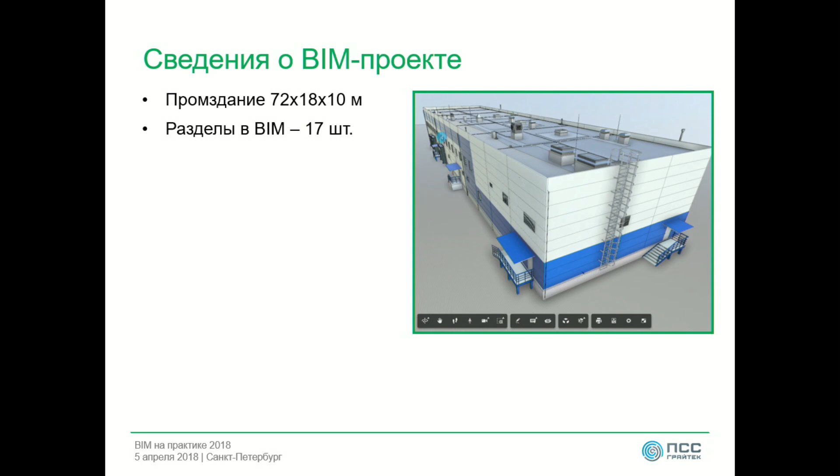Quick info about this BIM project. This is an industrial facility, 72 by 18 by 10 meters. It's a rather small facility, but it's very fitting for our purposes.

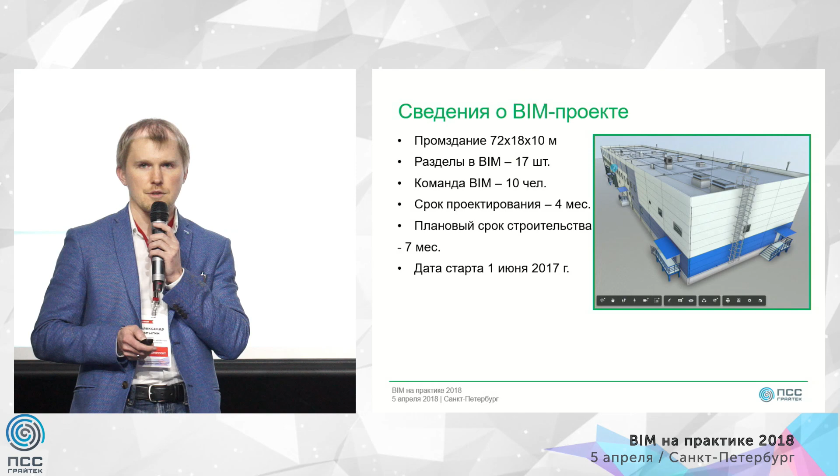17 parts in BIM project, 10 people. Construction plan schedule was 7 months, and design began on June 1st, 2017. LOD 400.

Our main goal of using BIM technologies was to present to the clients the capabilities, the potential of this technology, and to demonstrate our strengths and our capabilities in working with BIM 360.

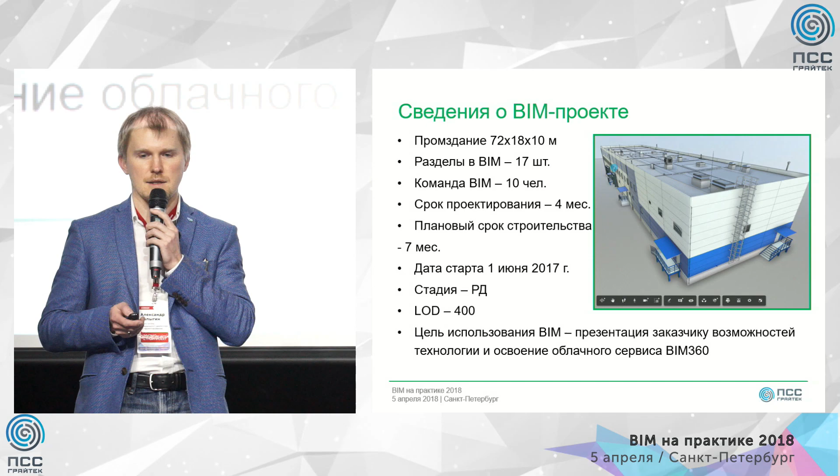We decided to use this cloud service, BIM 360, in our next project, because we worked with a remote design team, and we thought that it would fit perfectly considering our needs.

Apart from cloud solutions, there were also local solutions: BIM 360, Glue, Field, Recap Pro, Recap 360 to analyze laser scanning, Revit, AutoCAD and Navisworks.

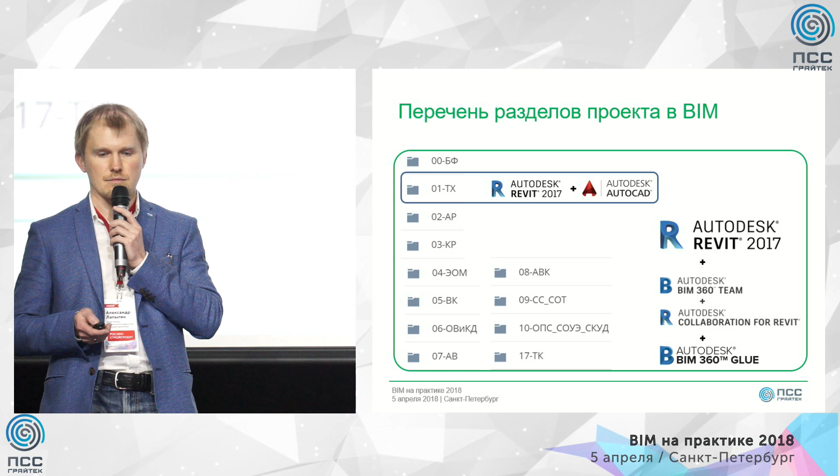This is how it breaks down, category by category, but I think it's more or less clear and self-evident. Everything is according to a GOST state standard.

The BIM uses list shows that we've used BIM mainly for design and for on-site supervision.

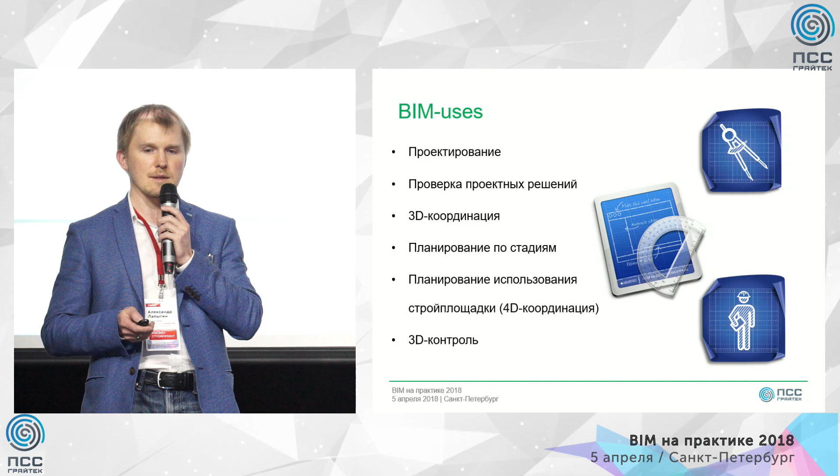Goals. Any design team has one main goal: to improve the quality of the final result.

So all the modern technologies and modern tools that provide this functionality all have this ultimate goal in mind, and we shouldn't forget about it. Everything else is secondary.

What we also needed was to have access to all files in one place with internet access, to use external links while working with models, so that the chief engineer could always have access to these models, and version history.

To maintain the version history of the files and of the models was also important, so that if anything goes wrong, we could go back a step.

And also make functionality to leave comments and remarks, and to evaluate the quality, the results of work. That's also very important, and something that is overlooked very often.

So 10 people, like I said, there are 10 people here: electric engineer, utilities, water engineer, automation, architect, designer, BIM manager, and chief engineer. So several things that we did when we prepared for this project.

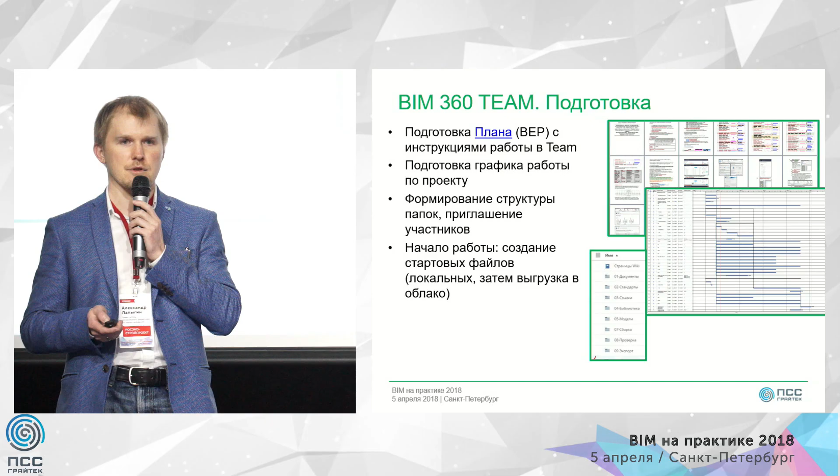Folder structure, invitation of all participants, then start of work. You cannot just copy a local model file to the cloud.

First you need to make a file in the cloud to be able to work with cloud-based files later on, and external links. So we had to make these start files first.

Our consultant, PSS Graitec, whom we worked with during this project and whom we consulted with extensively throughout the project, helped us with cloud services in particular.

This enabled us to check for conflicts and collisions, and to prevent these conflicts from appearing during the design stage.

Just a recent case, 1 week ago, happened in our company. Designers who didn't have any Revit experience, who have to work in Revit now, but who only work in their own section, do not have this habit of uploading the next sections.

So recently we had a model with very big conflicts between different utility networks, which they could have easily avoided had they uploaded the next sections to the left and right from their section. So that's something to pay attention to.

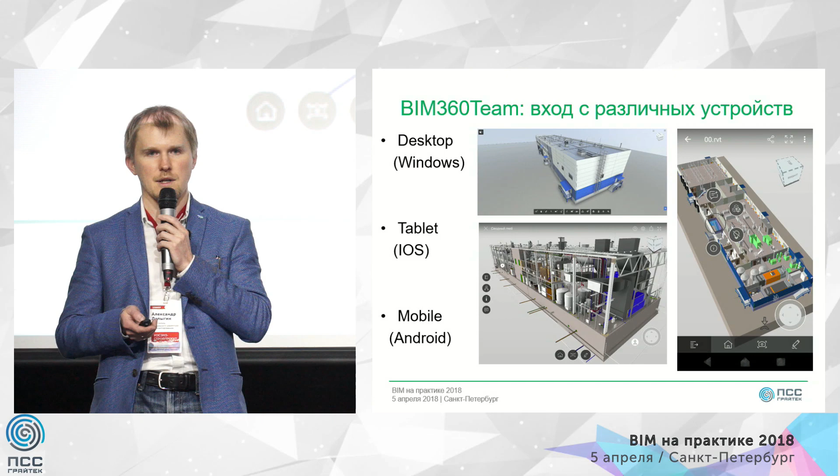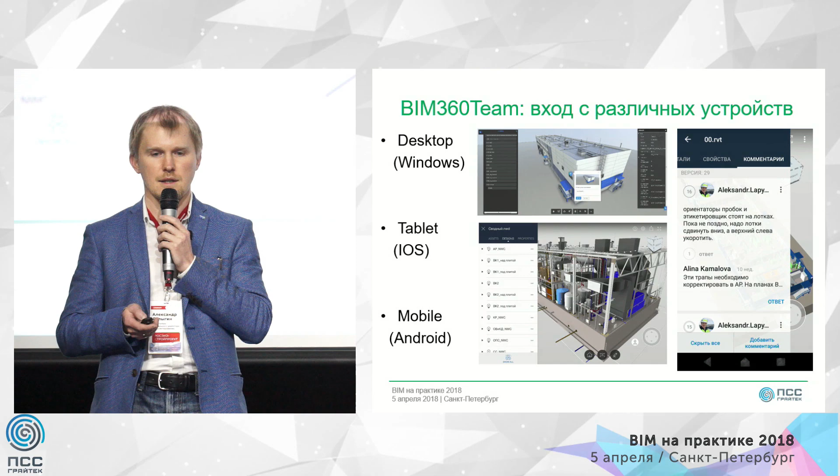So Windows, PC, iOS, iPad, and Android mobile phone. I can tell you, as chief engineer on this project, that it's very convenient, and sometimes the mobile app is even faster than the desktop version. It's very handy that you can access the model all the time, leave comments, and see how works are progressing.

Data uploading is also very easy. You can just drag and drop the files into the cloud, and you can also store any other file formats, not just models - AutoCAD files, PDF files, Word files, whatever.

From Revit, you can work directly from the cloud. You need to create one file-based or cloud-based model, and then it doesn't really make any difference whether you work from the cloud or locally. So sometimes designers just do not know where the file is - on their computers or in the cloud.

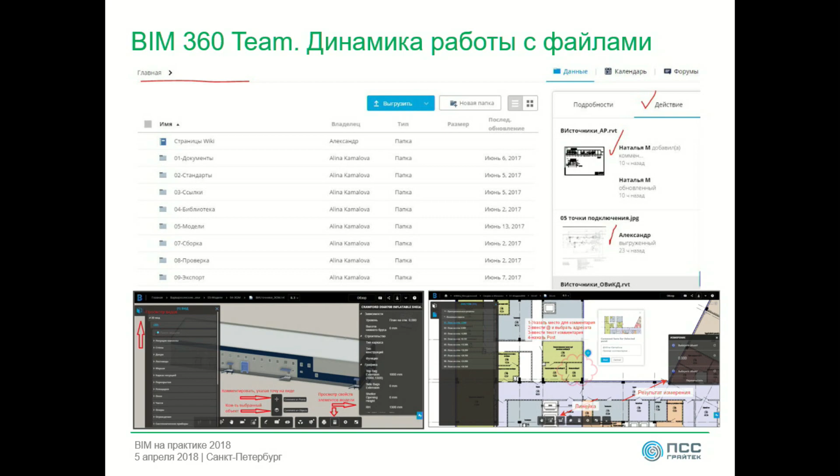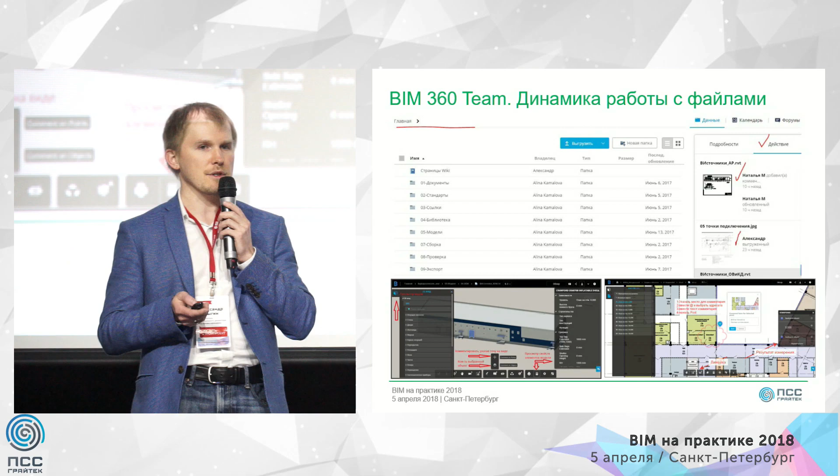So if you want to see what has changed today in the project, you go to this Actions tab and see what was changed, when it was changed, and whether there are any comments if designers left any. So this is how it looks like.

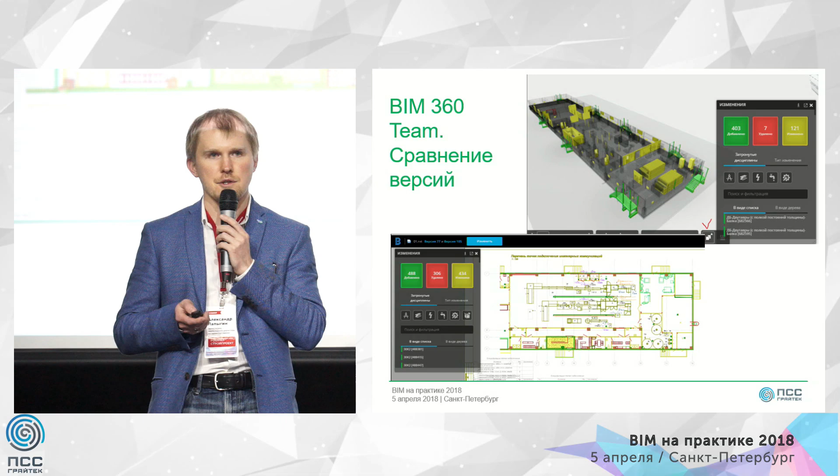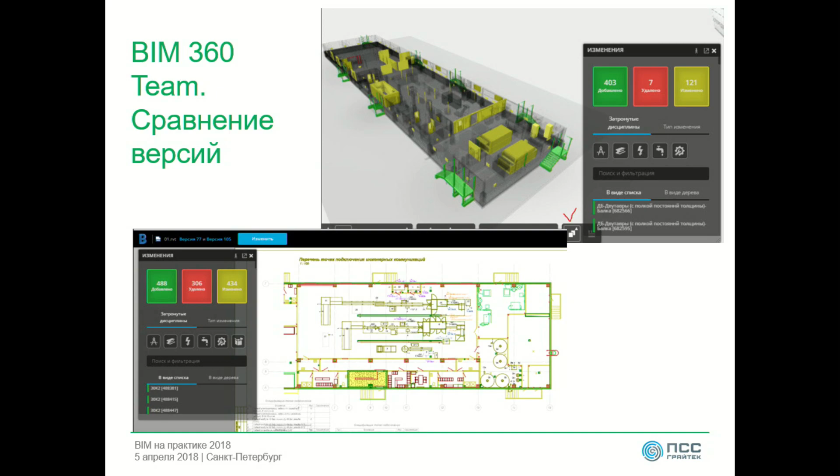Another important functionality is, if there were some changes in the files but no comments, you can compare two file versions directly in 360 Team. Here we're comparing different versions of a model, and we can see there were several dozens of new models, and you can see the difference - 488 elements were added, 306 elements were deleted, and 434 elements were changed. This may be very important both for clients and for the chief engineer and subcontractors.

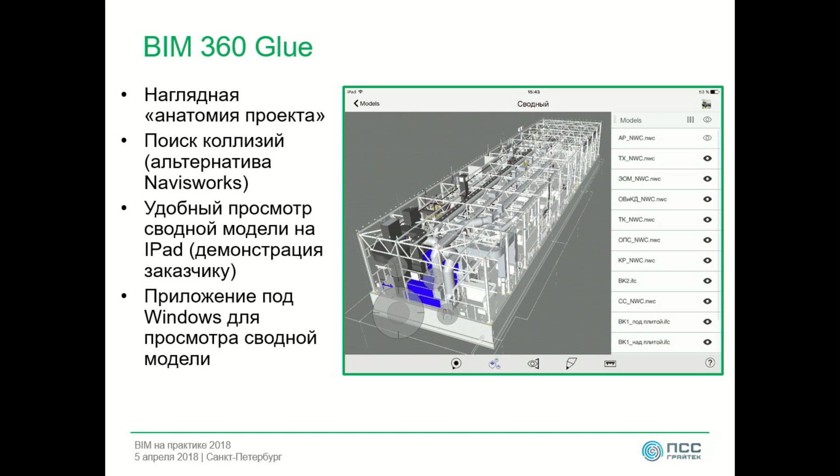Another app from the BIM 360 family is Glue. Previous speakers have already mentioned Glue before. We are using Glue as a presentation tool, because if you install it on iPad - by the way, I do not know why there's only an iPad version, I think the developers only had iPads and didn't have Android phones - but it's a good thing they have it on iPad, because you can always open the general model and show it to the client or potential client, to your partners, and it's very handy.

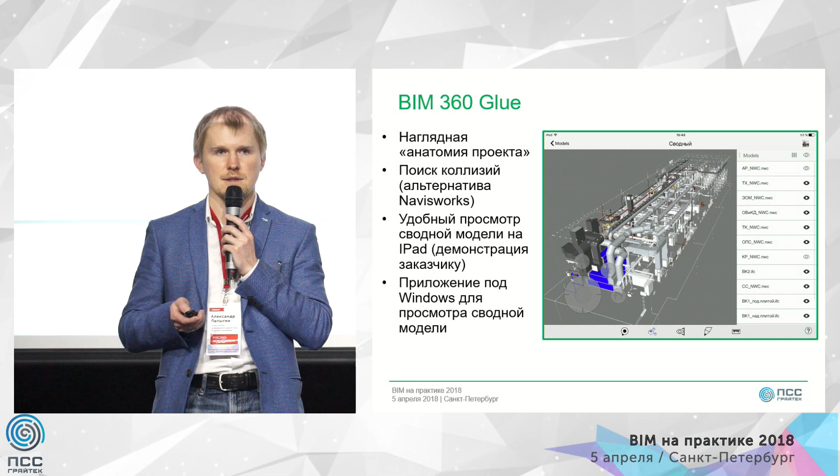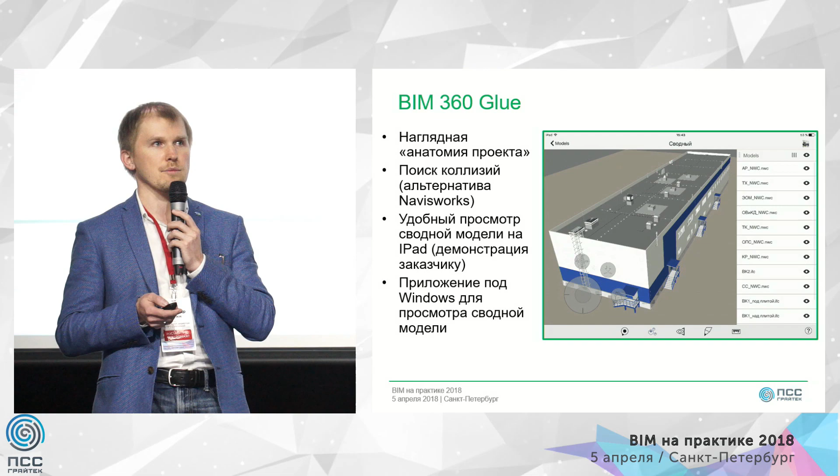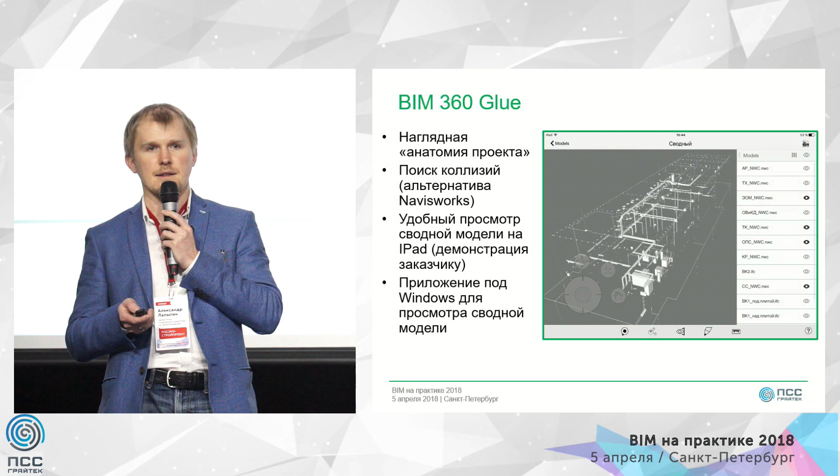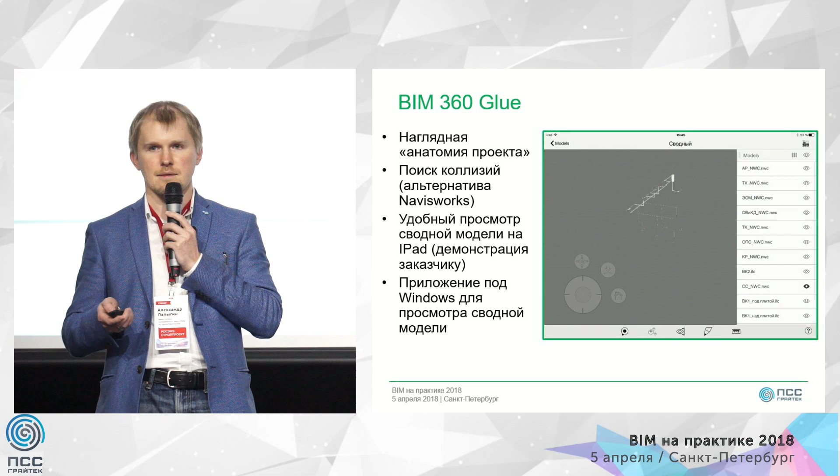Well, iPad became a working tool for me since I started using BIM 360 Glue, so I'm always carrying it with me to any meetings, so that I would be able to show quickly what we are doing. Today there were several presentations showing very impressive videos and pictures, screenshots from utility networks, MEP systems, but everything was done in Navisworks or in Revit, and you cannot carry that presentation always in your pocket. So this ability to just take out your iPad and show the client the model is a very good opportunity.

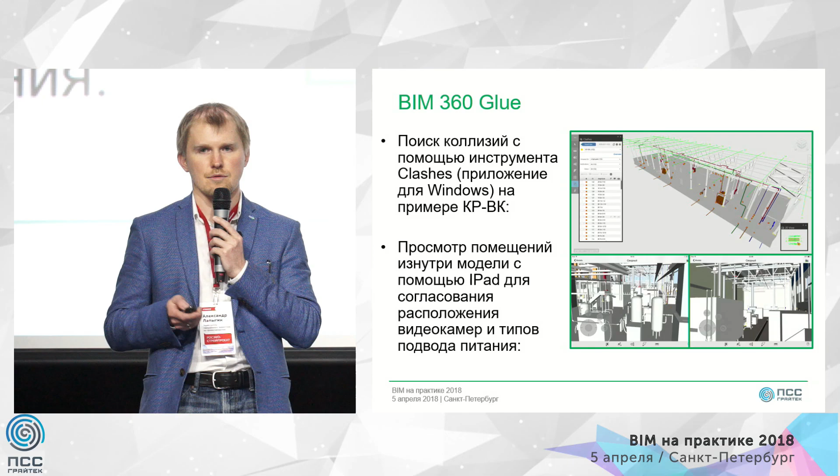Also, we used Glue for collision checking, and we also used Navisworks for it, but in the future we are planning to use Glue more. This is how it looks like when a collision is found.

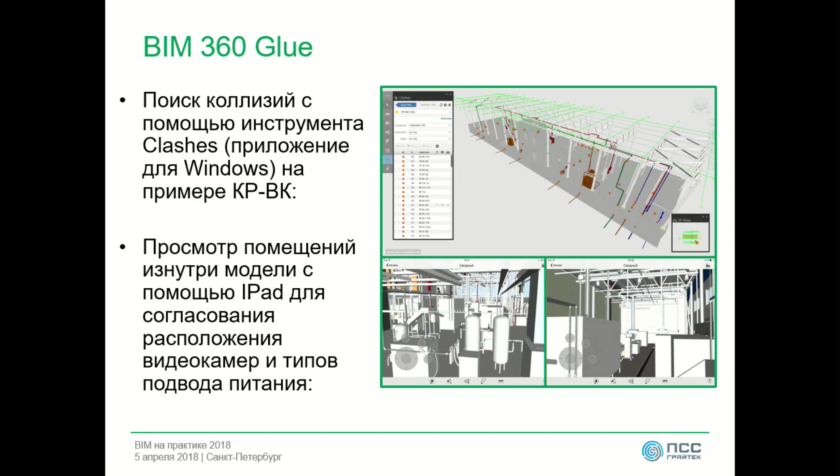The advantage of Glue is that it's cloud-based, so you can open everything in the cloud, and all designers have access to change something on the go. And again, Glue gives you the opportunity to see the inside of a model, and this gave us two opportunities: to coordinate the location for CCTV cameras with the client, so you can see, if you put a camera here, what will be the viewing angle, what will it see - it's very handy. And another advantage is electric grids.

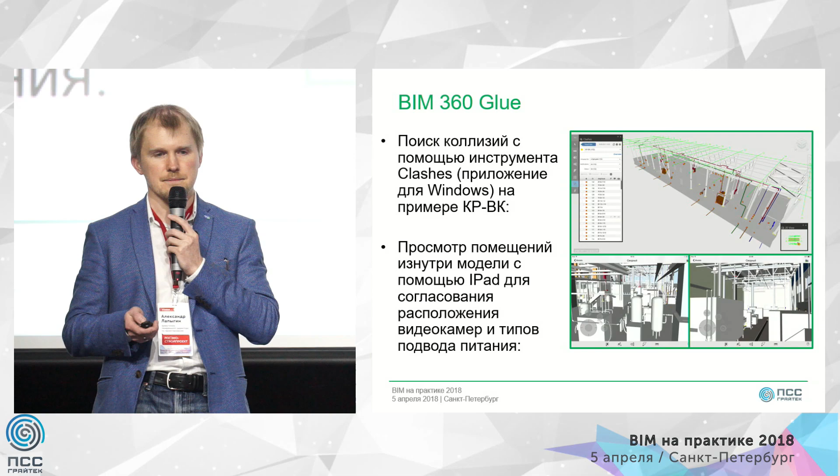Where do we get the cables, electric cables? From the top and from the bottom. And it turns out that from the top you have to use cable trays more, but it gives you more flexibility. So we decided, together with the client, eventually to use the from-the-top approach for electric cables.

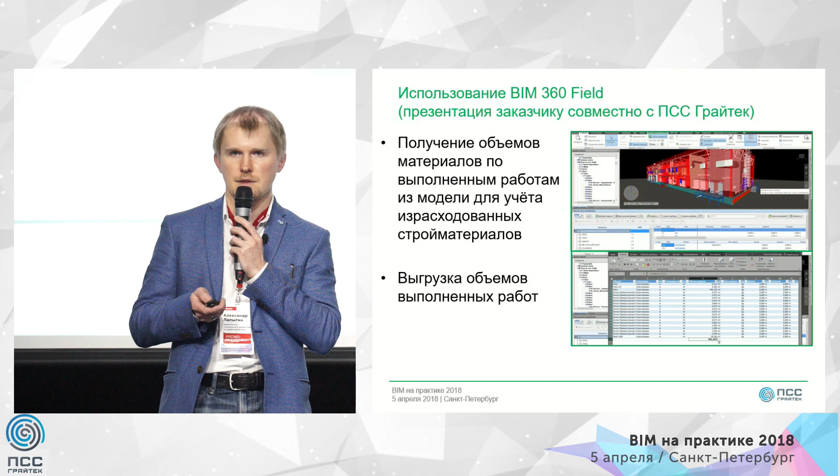Together with PSS Graitec, and with previous speaker Alexey Vlasevsky, we did some testing of BIM 360 Field. We created a presentation for the client, and you see on the slide approximately how it looked like. We showed it to the clients, showed the capabilities.

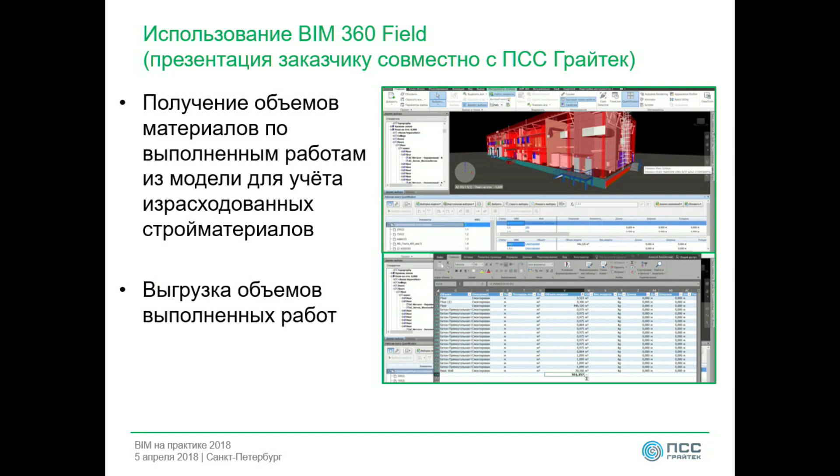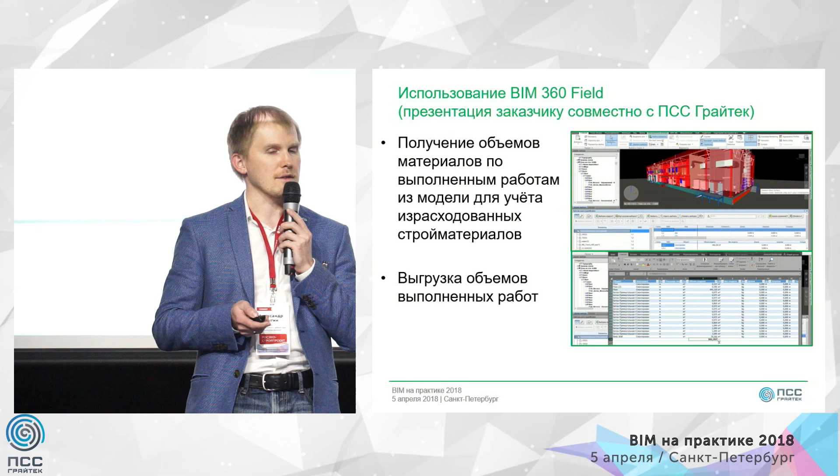In this case, it didn't bring us any further. It didn't come to fruition, because the client should also have their own in-house expert who can do the BIM control, or a hired professional. But the budget wasn't big enough, so the presentation remained just a presentation. But the client now knows they have this opportunity, and maybe in the future they will use it. Besides, there's going to be another Field version coming out soon with additional functionalities, so it's quite exciting.

Although clients still had this nasty habit of sending letters requesting the updated version of the drawing, so they still are not completely trusting the cloud. Please send us the latest version of this drawing.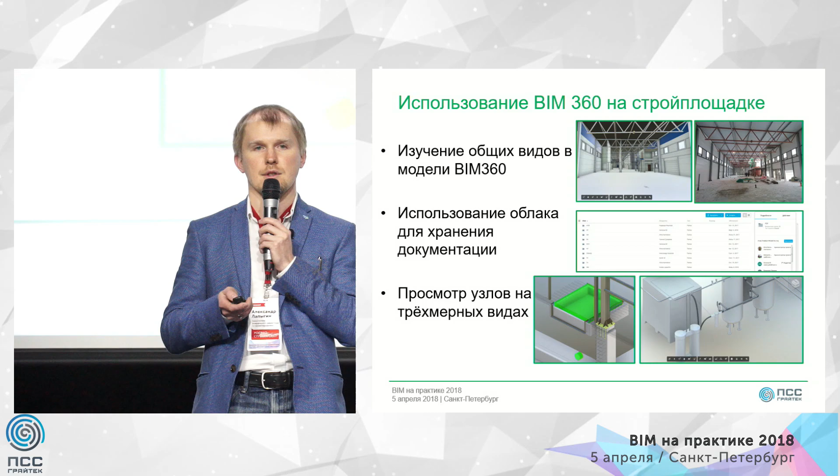And 3D view of different joints. Again, using Android apps or iPhone apps, you can download a model from the cloud and see the details of some small things, like in this area, for instance, where you have a 3D compressor model, and it's very detailed.

Laser scanning is another thing that we did. After the installation of all steel structures, we did the laser scanning. You can see the results. This is not a picture, this is just a point cloud.

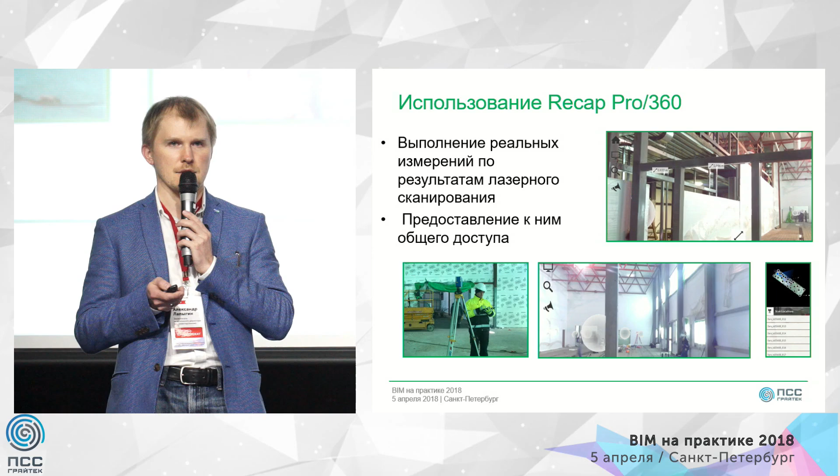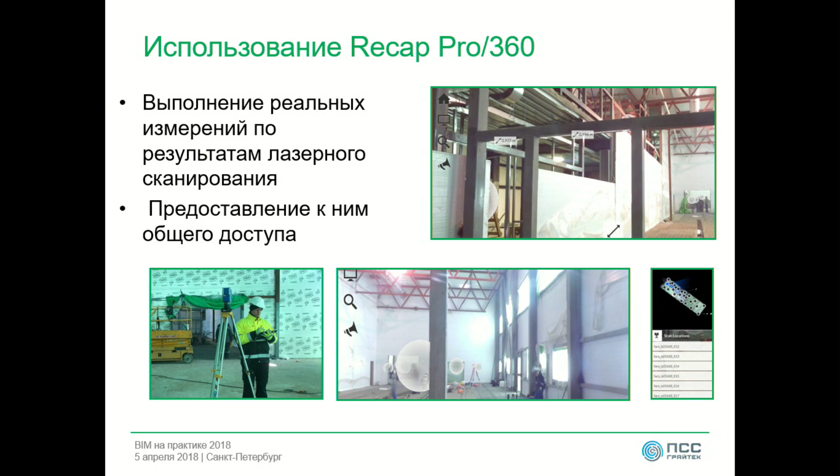Sometimes clients asked us, what kind of pictures are these? Where did you get these pictures from? This is not a picture, this is not a photo, it's a point cloud. And you can view these point clouds directly online. You can provide access to the client, and the client already, on the go, knew what we have and what they will have after construction finishes.

So after installation was completed, we merged the point cloud with the model, found some collisions, identified these collisions, and here you can generate this conflict report for the client. Again, what Alexei said in the previous presentation.

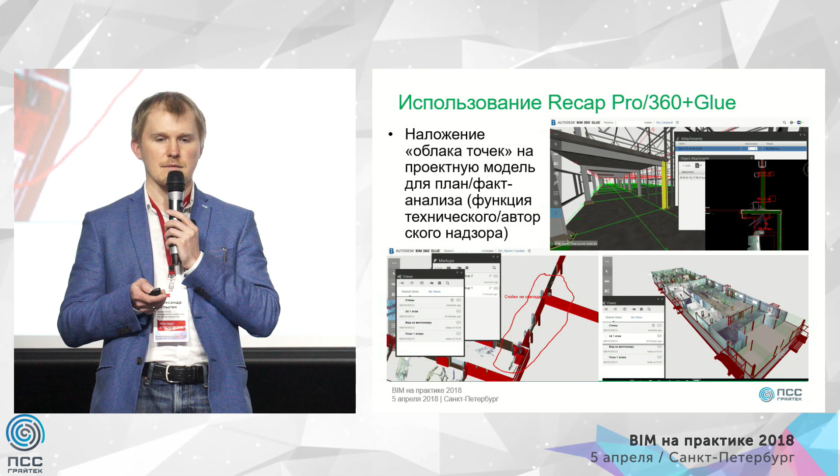We are looking for some automation tools that would enable us to do this in an automatic mode. And as I understood from the Vinci Company presentation, from my colleague, they are at the same stage. They're testing different software solutions to find automatic capabilities, and until they find it, they do it manually. And this is what we do as well. We put the column here, and we check that, in fact, the column is 10 centimeters to the left from where it should be. So there's still some room for improvement here.

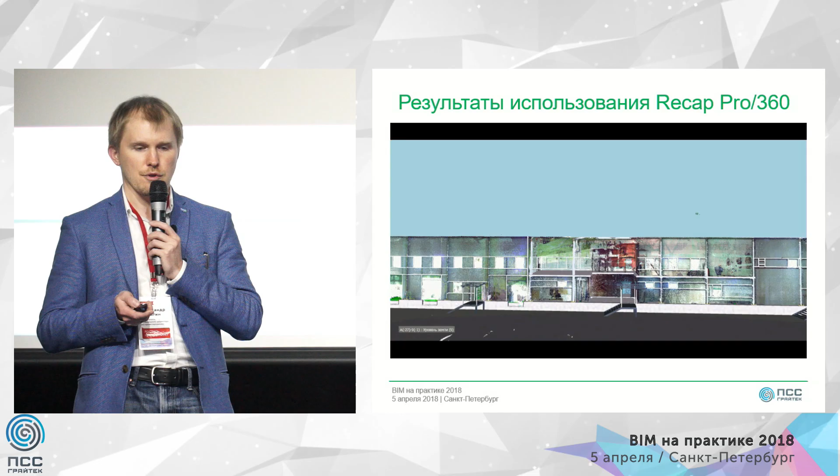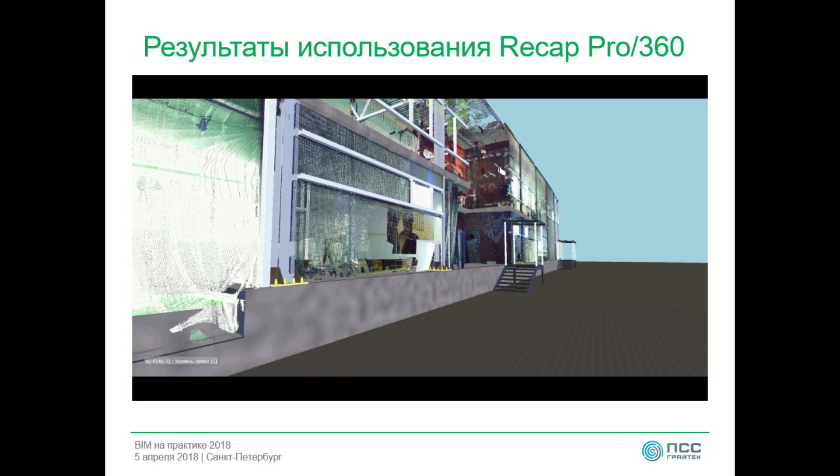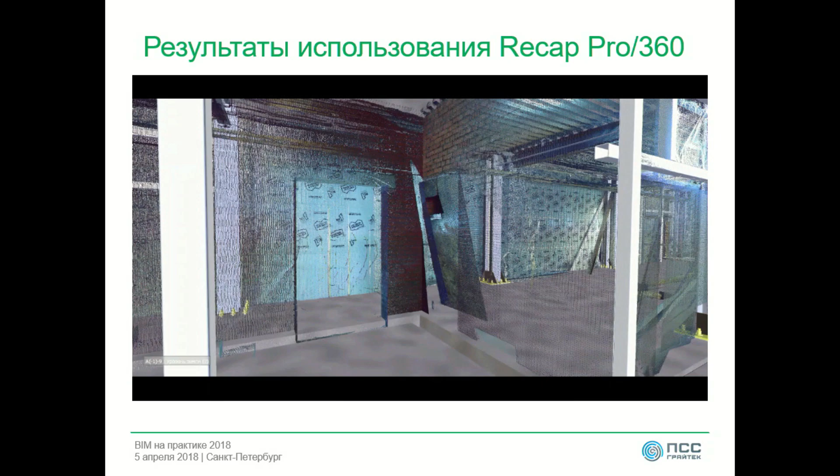This video shows the overview based on the scanning results. The route was identified already at an early stage, and when we combined everything together, we got this joint, combined model. And while this video is going on, I'd like to ask you a question.

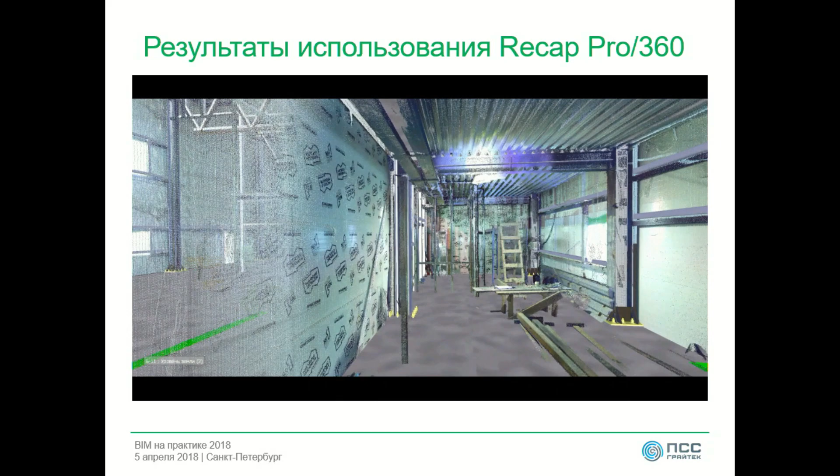How many of you, please raise your hands, work in various design institutions or design companies? Well, around 80 or 90% of you work in design companies.

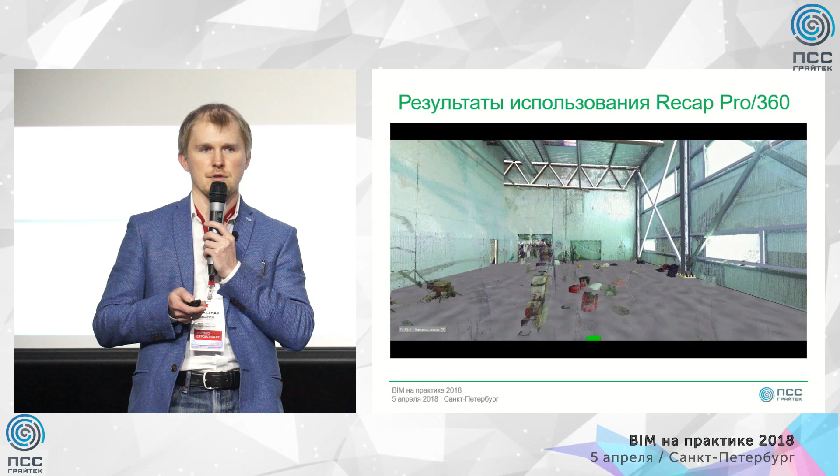BIM 360, like I said before, gives you very good opportunities and functionalities to show the results to the client. And the BIM design market is very immature now. The vast majority of clients just do not know what BIM design is, and there is a small category of clients who have heard something about it, but who are still considering whether or not to implement it.

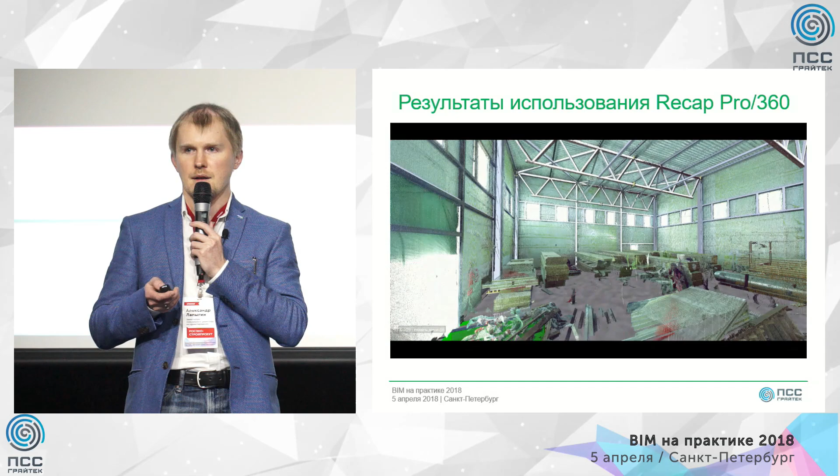So the market is very small, and there are not many companies who are doing actual BIM design. I do not see any real competition between these companies, but as time goes, the more fierce the competition will be. And BIM 360 allows you to broaden this market and raise the awareness of clients about these capabilities, using mobile solutions that you can showcase by just pulling out the phone from your pocket. That's a big advantage for any design institution, any design company, to show what they do, always.

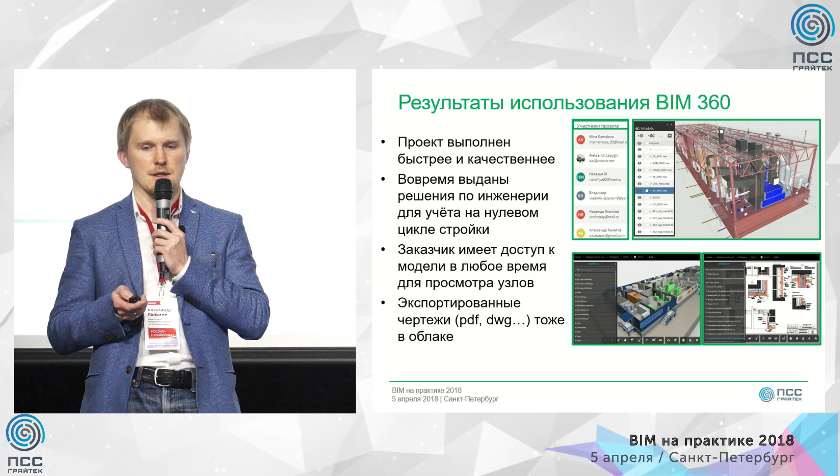Better quality, timely delivery, because construction begins in parallel with the design works. So when they start doing the foundation, you already have to know where water lines are going to be, where water stands, etc. are going to be located.

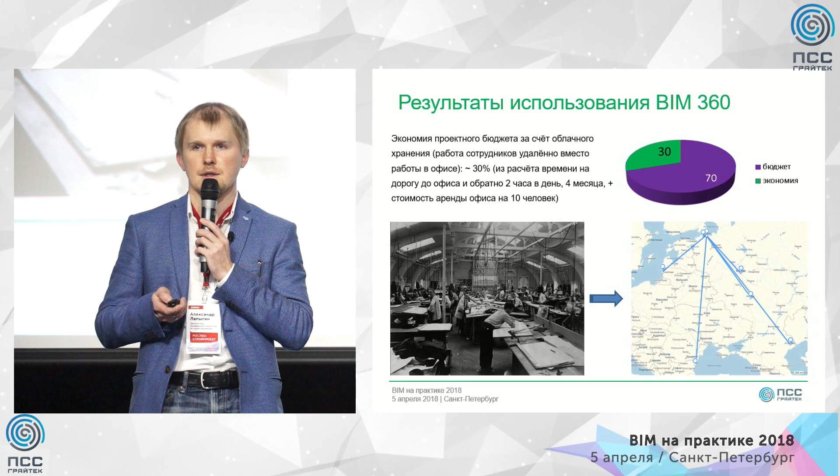Another advantage is financial, because our team is geographically located in different locations, not always on the beach, but in different parts of the globe. So they are not working from one office, and this helps you save time, traveling time, coming to work every day and back. Our estimates show that around 30% of project budget was saved. Of course, BIM solutions and BIM design are more expensive, and the licenses are more expensive, but still there is some room for saving.

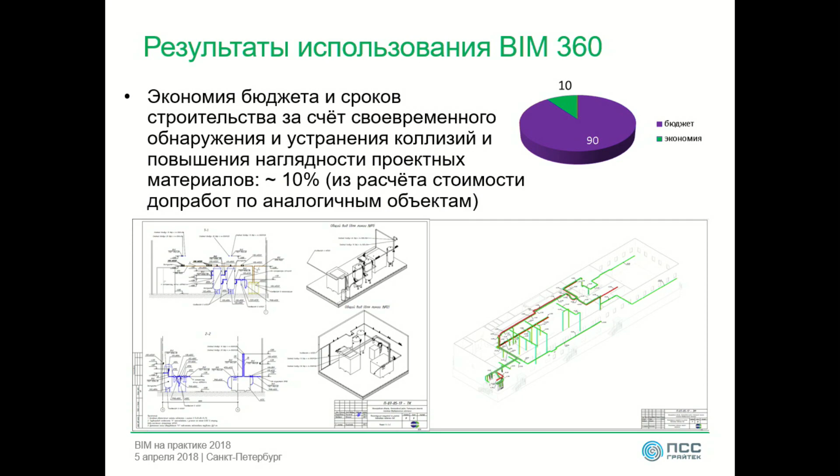As for construction, nobody will give you the specific figure of how much money you save, but by comparing with other projects, we have identified around 10% saving possibility. For instance, cable tray design, compressor station.

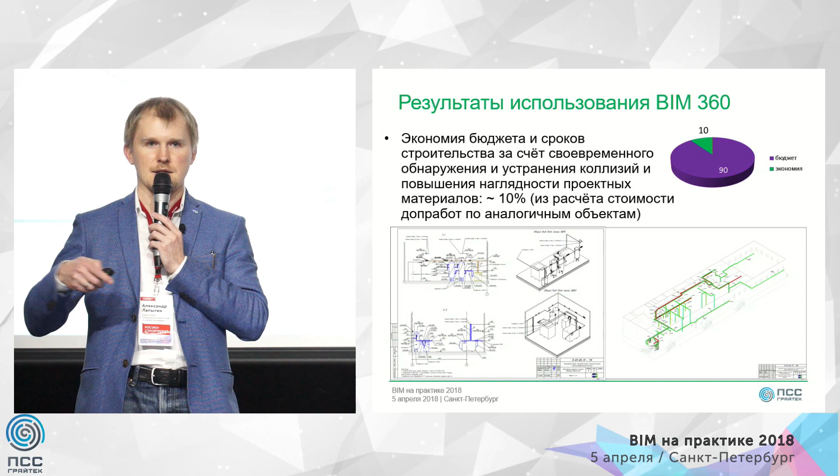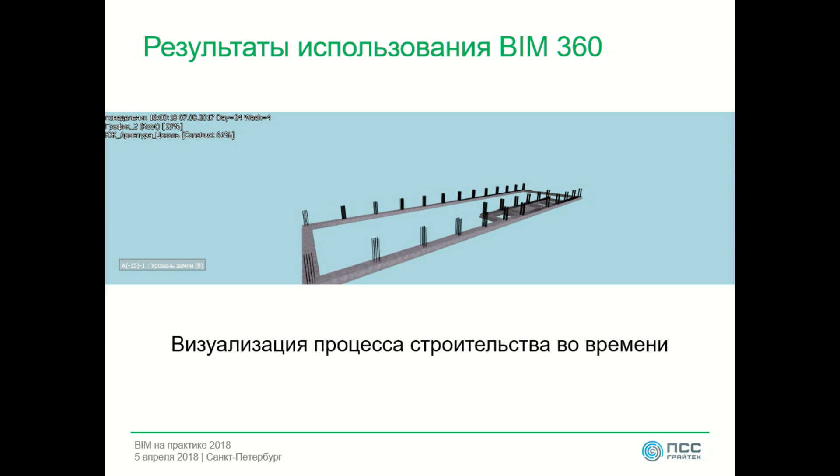These technologies give you very good visual capabilities. The main thing is that all contractors should be aware of this BIM design, because they may think that if they see some strange shape of a cable tray, for instance, there's a mistake, and they need to improve it by making it more simple, the way they see it. This is what we had on our construction site, so we had to educate them that this is the right thing, the right form, the right shape, and they don't need to change anything.

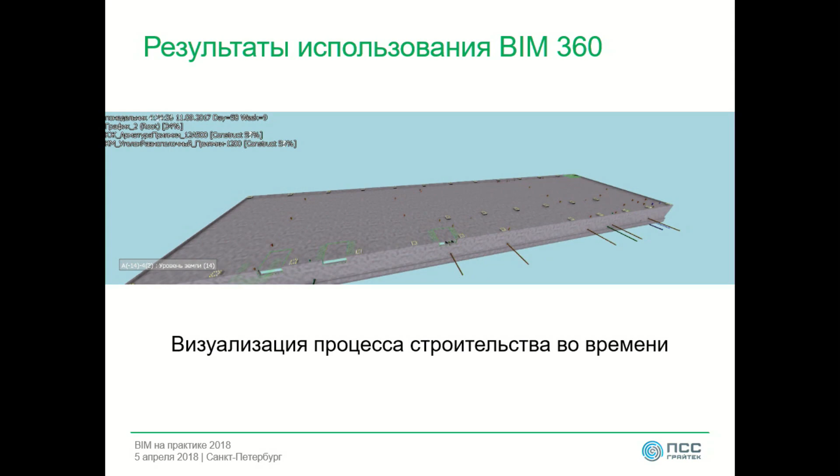So this is construction visualization. We did this 4D model. We also presented it to our client, and the first question the client had was: does it assign the sequence of work? Your software, does it assign the sequence itself?

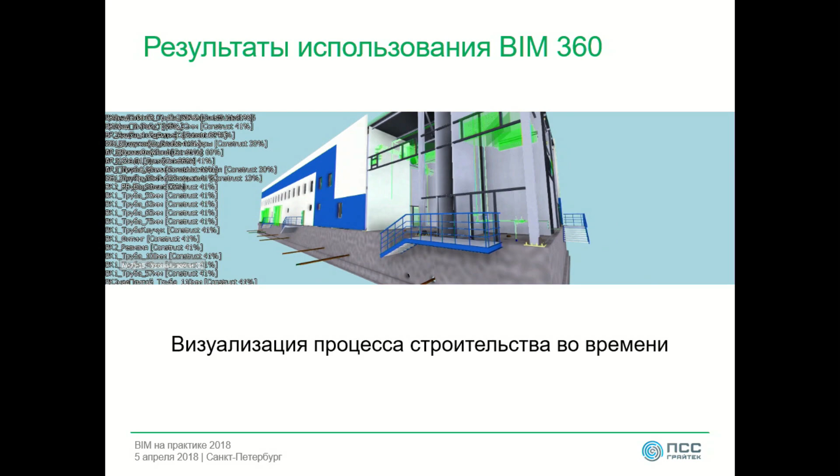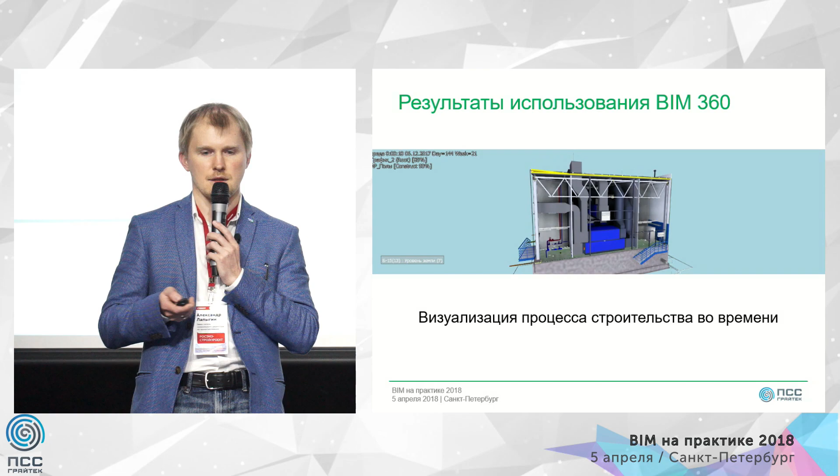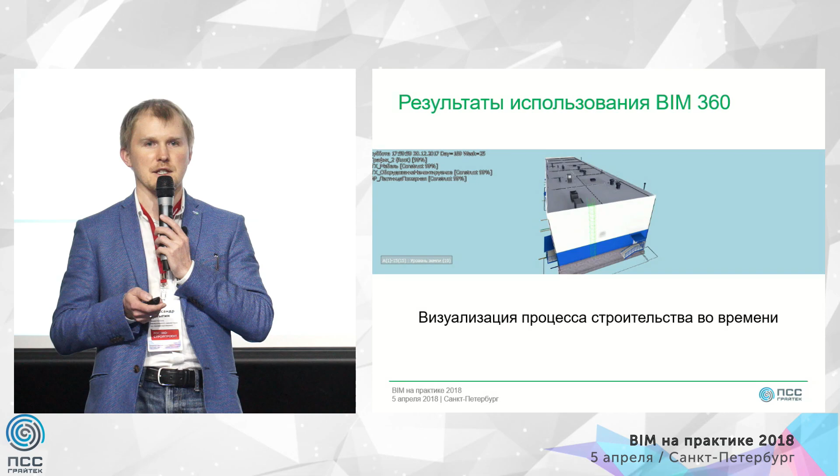No, it wasn't the case. Of course, we identified the sequence of works ourselves. I did it personally, based on construction logic. And based on this, we made this video so that the client could control all the works that contractors do and at which stage what works will be carried out. I hope that in the future, thanks to Autodesk's efforts, we will have AI capabilities as well, so that the program itself will identify what should be done after what, the sequence of events.

That's just how visualization works, and prospects, where it can be used in the future.

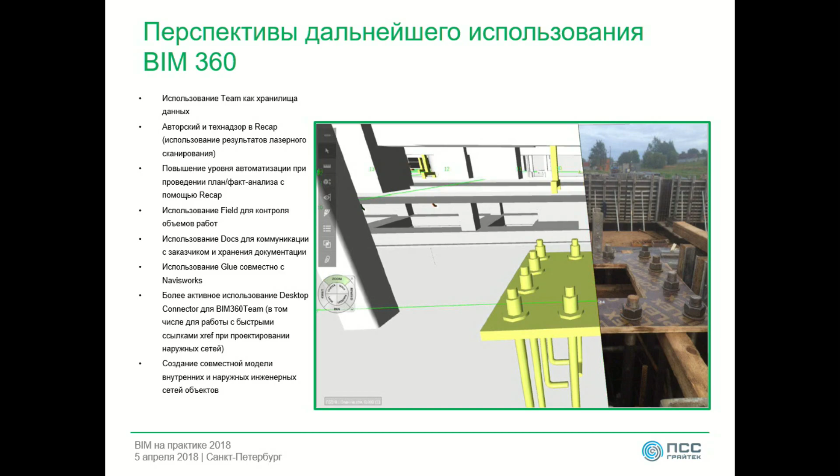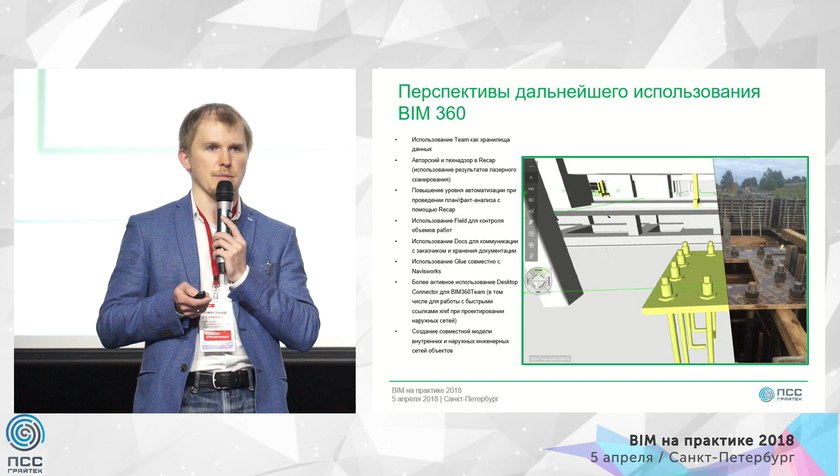We are going to use BIM 360 Team in the future for data storage, and we do use it in our current projects. We are going to continue doing on-site supervision using Recap capabilities, laser scanning. Also check new Field capabilities. And we are also planning to use BIM 360 Docs for client communication, because it has more functionalities, although it's more complicated. But it's also more effective because it has different access rights, and you can assign different access rights to different users. And we are also planning to do a joint model for internal and external utility networks in Revit and Civil 3D, and marry them together in one model.

Now I'm ready to take your questions. Thank you, Alexander. Any questions, colleagues? Please raise your hand.

I have actually two questions. First, was there any expert appraisal, expert analysis, and how did you use BIM with expert appraisal? And the second question is about utility systems. Did you do electric grids, low power grids in Revit? So first is about expert appraisal, and the second question about electric networks, electric grids. Did you do this in BIM also?

The first question about expert appraisal: well, we didn't have any expert appraisals because we had one stage design works. Everything was done in one stage. Right now we are implementing a much larger project which is going to be appraised by Moscow authorities, but from what I see, state experts do not need our BIM model in any form. This is only for the client, which is surprising because already in 2014 the same Moscow appraisal authority, we had speakers in 2014 here, and they boasted about 300 projects with BIM technology that they reviewed. But as far as I understand it, it's not required, it's not in demand right now. They may have the relevant competencies to do this, but it's not necessary, it's not obligatory. All they need is a PDF version of a 3D file.